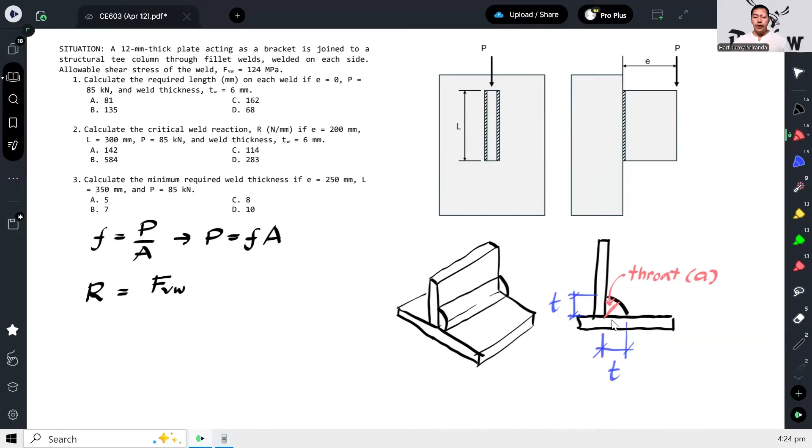So if you consider this triangle, let me enlarge it. This is the throat, this is the thickness, since this is 45 degrees. So for the length of the throat, using trig functions, you can use either sine or cosine, in this case cosine. Cosine of 45 equals adjacent over hypotenuse. So our A is T times cosine of 45. If you compute cosine of 45, that's square root of 2 over 2, or 0.707, so 0.707 of T.

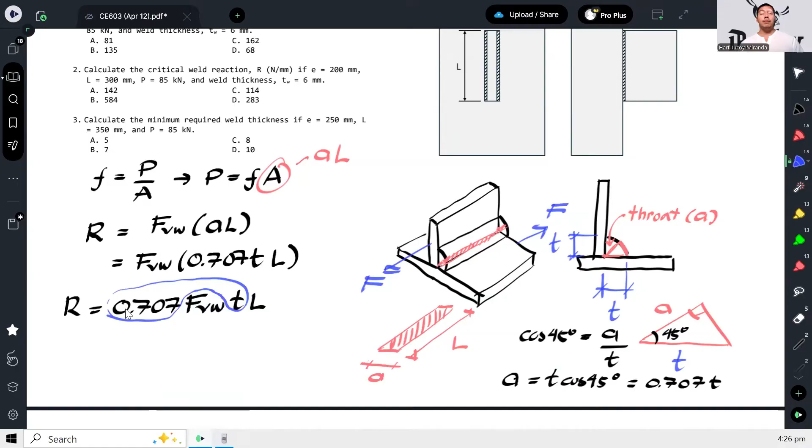But anyway, to calculate the required length: since the eccentricity is 0 for this problem and P is 85, there's no effect of bending or torsion. So we can say the total force on these two welds should equal P. There's R here and R here, so P is equal to 2R.

But what is R? We have P equals 85. So R is 0.707 FVW, that is 124, times thickness. The thickness given is 6 — that's what's asked, the L. So since this is in megapascal, we need it in Newtons.

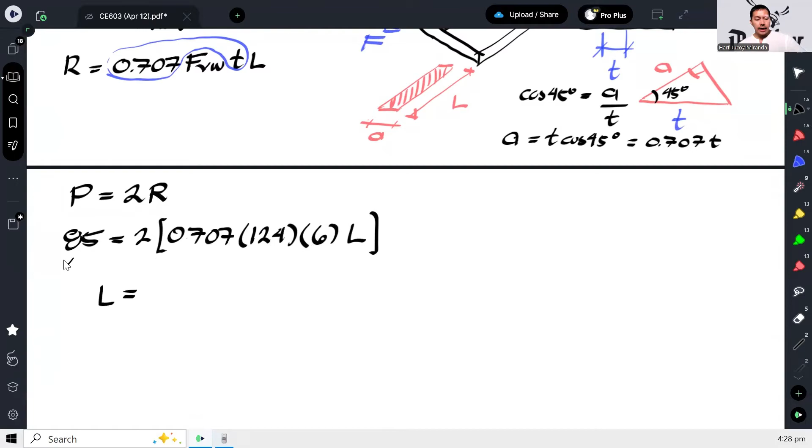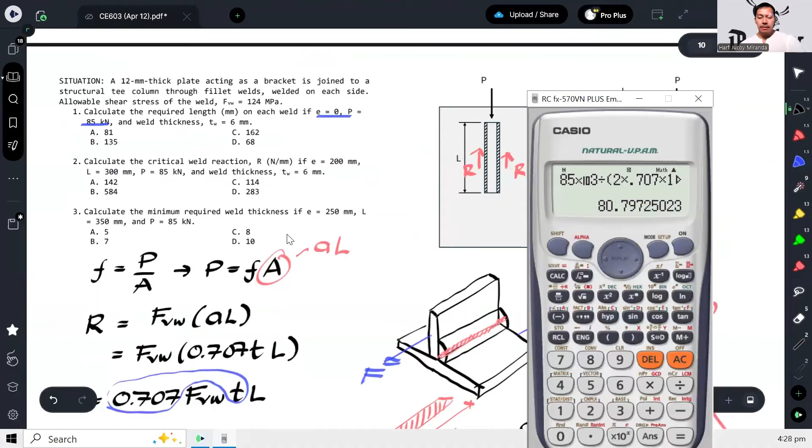So we have 85 over 2 times 0.707 times 124 times 6. The required length is... sorry, let me redo this. 2 times 0.707, that gives us 80.79 or 80.8 mm.

So we can round that up to 81 millimeters.

Number 2: calculate the critical weld reaction if e is 200 millimeters, L is 300, and P is 85, weld thickness is 6. So we're looking for the critical weld reaction in Newton per millimeter. Usually the weld is expressed in Newton per millimeter, especially when there's eccentricity present. This means we're analyzing which part of the weld is most stressed.

When we have an applied force, it will cause direct shear here. So it will cause direct shear. Let's call this RY, the unit shear force acting on the weld.

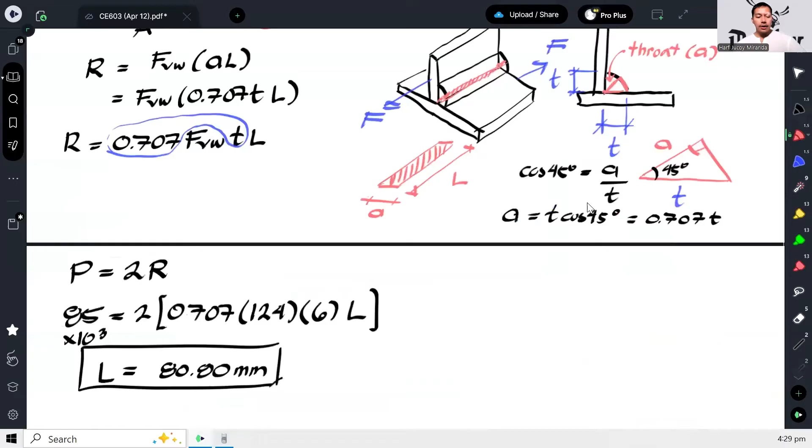So RY can be calculated as the applied P divided by the total L. In this case, we have 85 kilonewtons over the total L. Our total L is actually two L's, since our L for this problem is 300, and there are two L's because they're on both sides. So it's going to be 2 times 300.

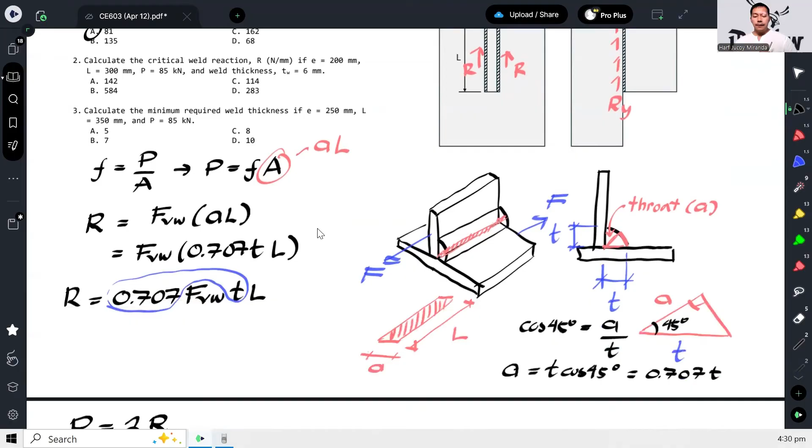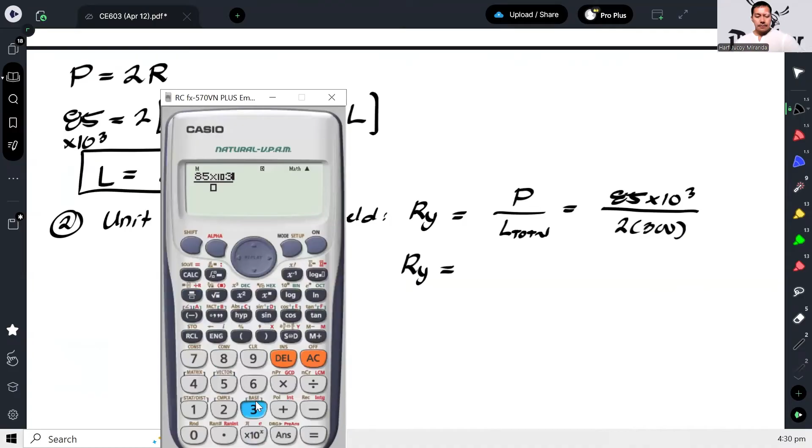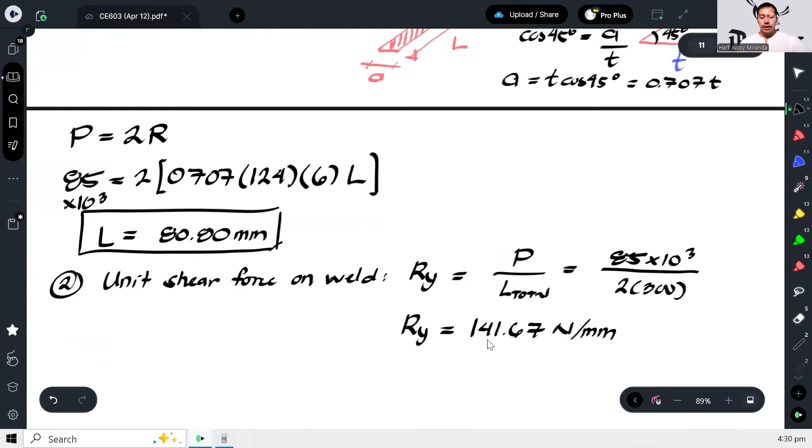That's gonna give us 600... so that's gonna give us 141.67 Newton per millimeter.

But that's not yet the answer because this is only the direct shear effect. That is the weld shear stress or shear force when E is 0. But take note, our E has a value, 200. So because of that value, there will be a bending effect, a moment.

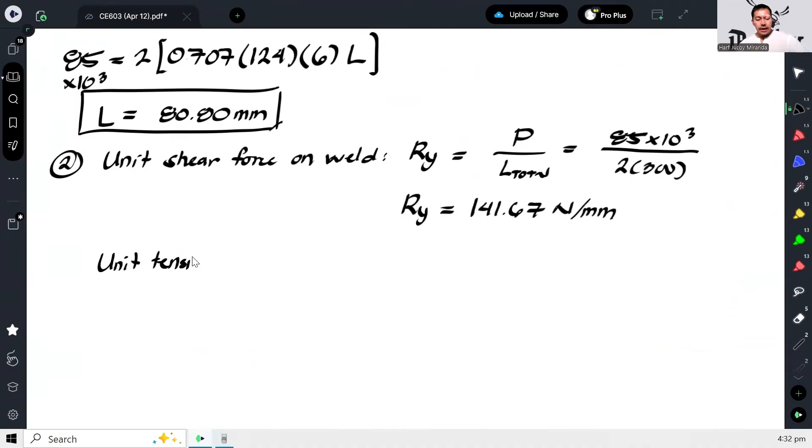The unit is tensile force on the weld - the maximum one, the biggest. So Rx, and that can be calculated as MC over I.

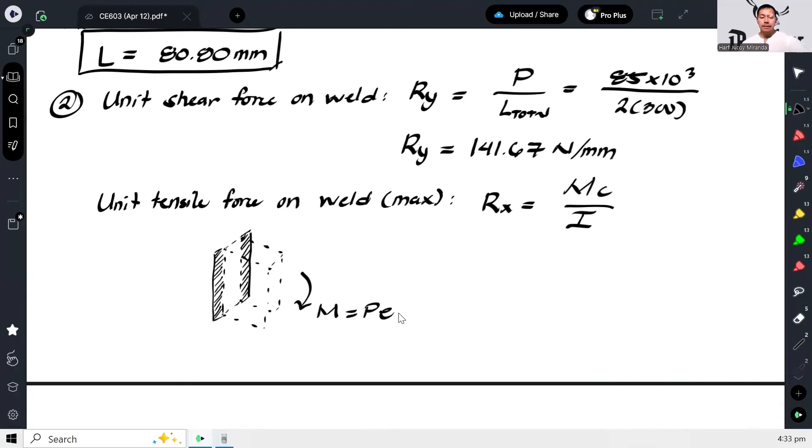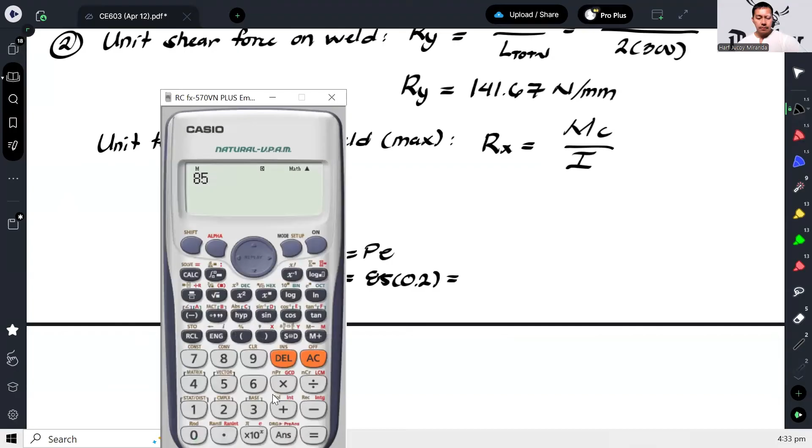Which is equal to P times eccentricity. Let me put in the values: our P is 85, and our E is 200. So 85 times 0.2 to make it kilonewton-meter, that gives us 17.

So this shaded region is the area that counters that force, for the moment, that's why it's MC over I. The neutral axis is in the middle, here. So that means our C is this, which is L over 2.

What is L? In problem number 2, L is 300, so that's 150. That's our C. Then the next question is, what is I?

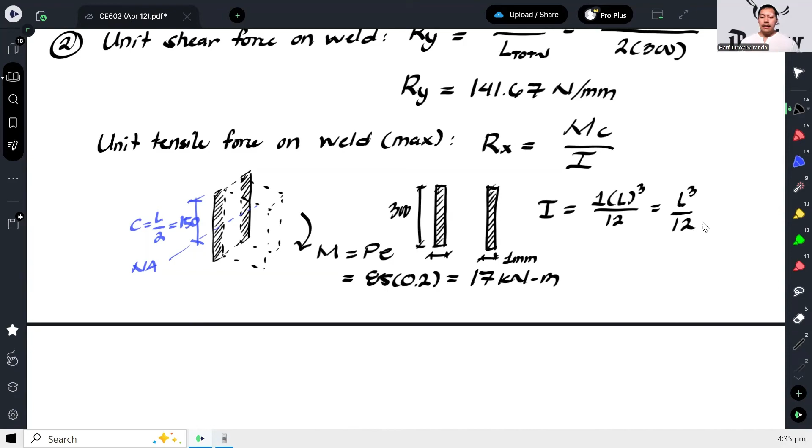So when we compute the moment of inertia, it's just L cubed over 12, then times 2 because there are two of them. So our Rx would be 17 kilonewton-meter, let's make that Newton-millimeter.

Our C is 150, then our I is L cubed, which is 300 cubed over 12, then times 2 because there are two of them. That will give us our Rx.

And that gives us 566.67 Newton per millimeter. Now, how do we calculate the total?

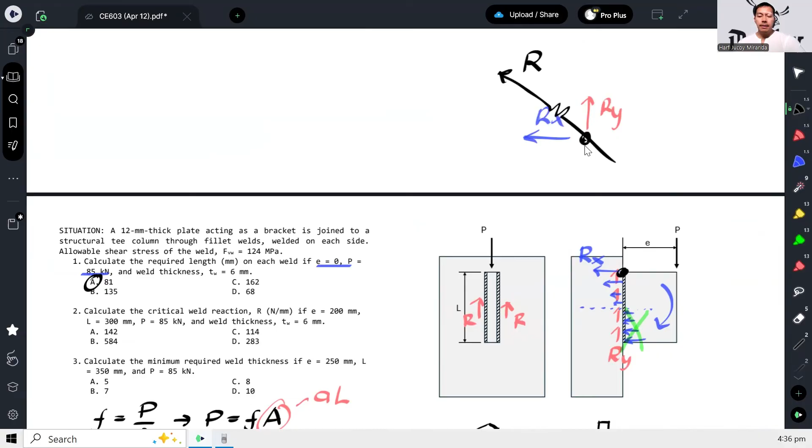The total is the resultant of these two. At this point, you have Rx, and you also have Ry, so their resultant is this. That's the total R, the maximum critical weld reaction. So the critical weld reaction R is just the resultant.

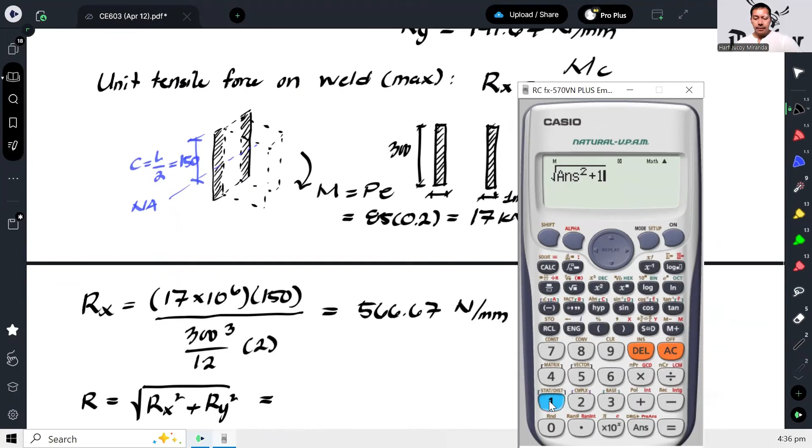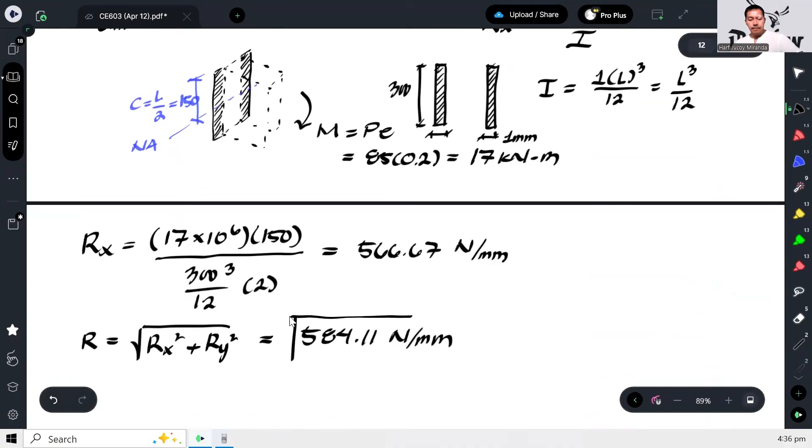And the other one is 141.67. So that gives us 584.11 Newton per millimeter. So for number 2, the answer is letter B.

Number 3: calculate the minimum required weld thickness if E is 250, L is 350, and P is 85. So let's repeat what we did since there's eccentricity again, but this time we'll solve for the thickness, T.

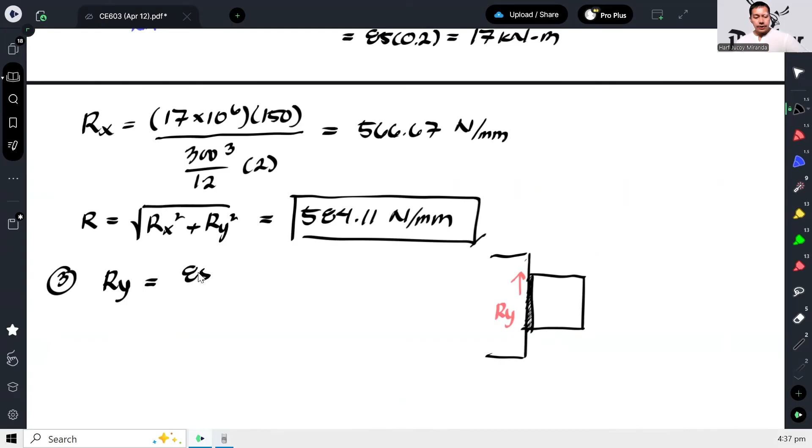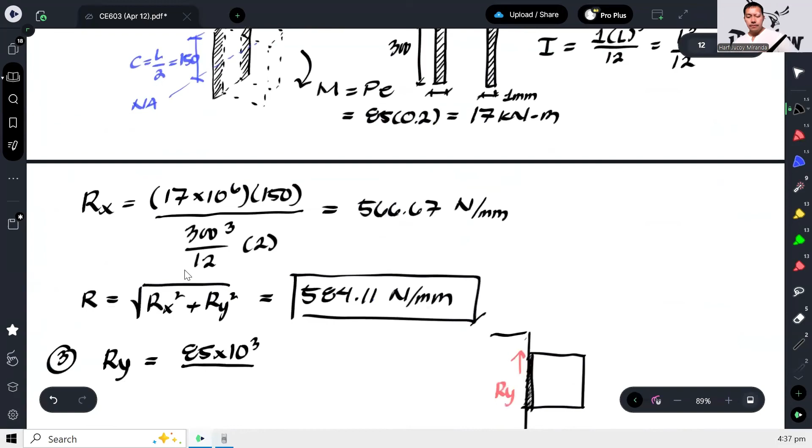Our Ry is just the applied force divided by L. In this case, the given L is 350. So our Ry would be 85,000 over 350, which gives us 242.86 Newton per millimeter.

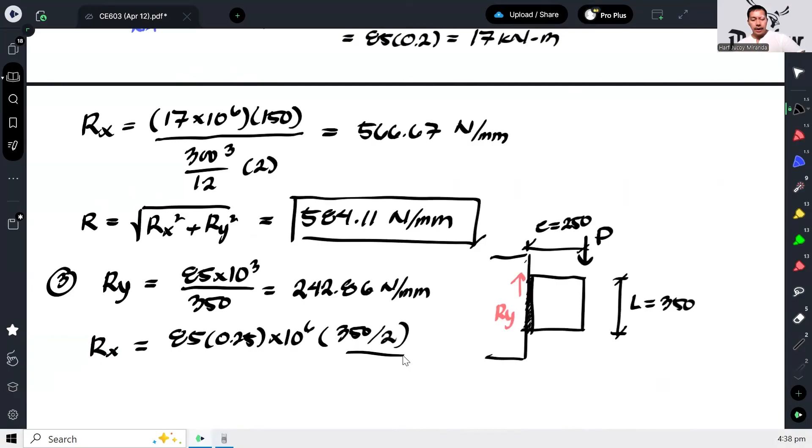Then our Rx, using MC over I: P times E times 10 to the 6, then our C is half of 350, over I. Our I is L cubed over 12 still, so 350 cubed over 12 times 2, since there are two of them on both sides. So our Rx would be...

520.41. Again, our R is just the resultant of these. So 574.29.

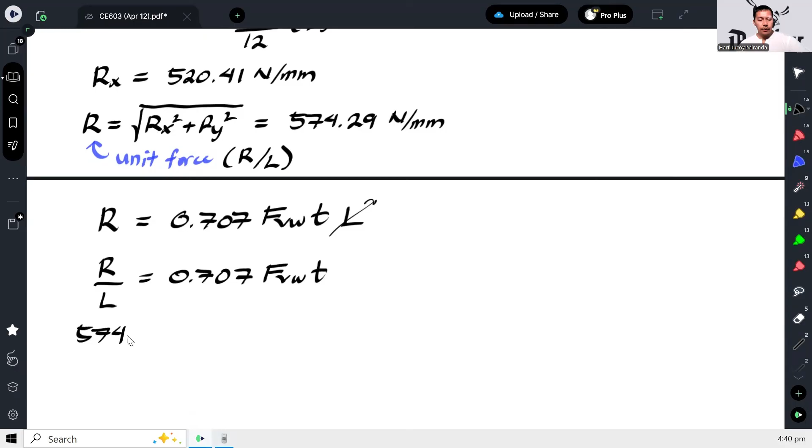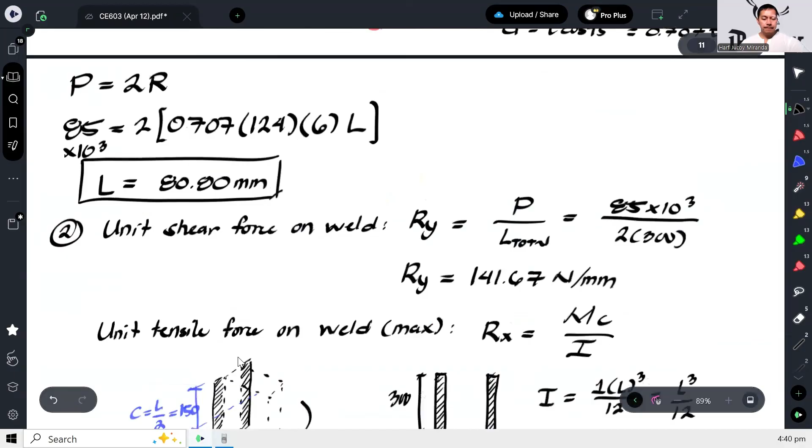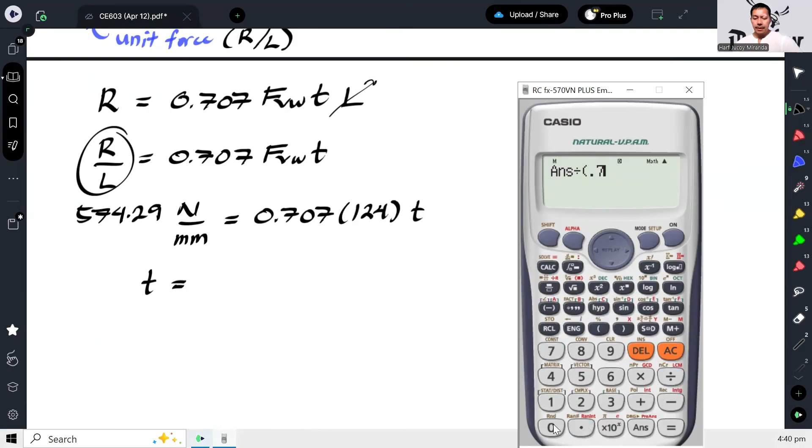So that's 574.29 - that's it, since it's already in Newton per mm, equals 0.707 times FVW, which is 124, times thickness. From here, we solve for the thickness of the weld: over 0.707 times 124, and that gives us 6.55 mm.

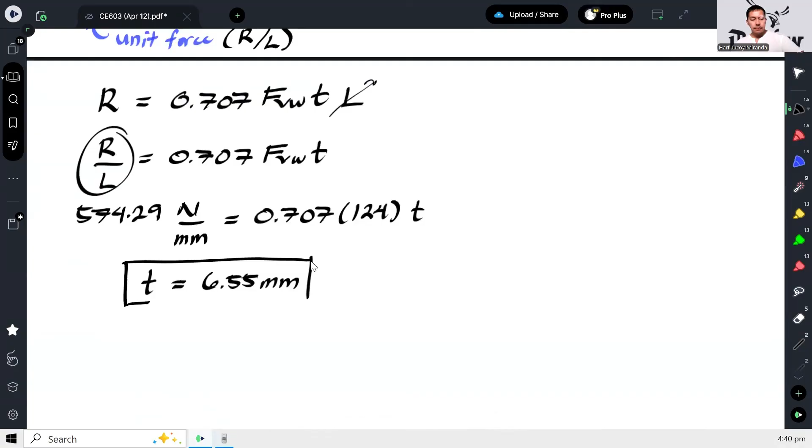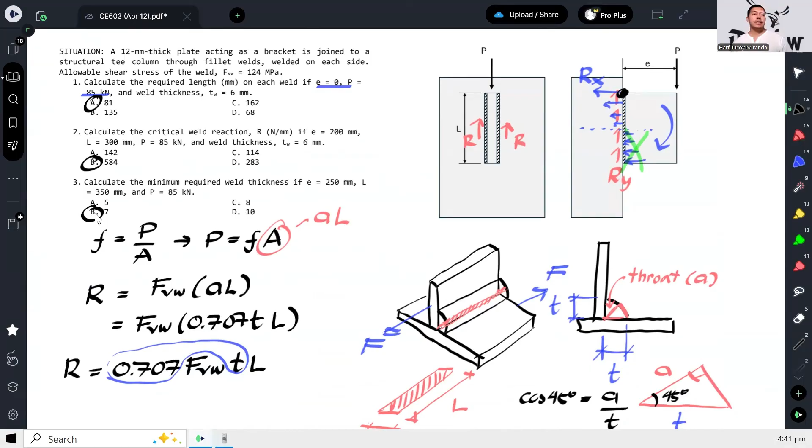From the choices, the values are whole numbers, so of course we use the next higher value - we round up to be safe. So our answer would be 7 millimeters, and that's how we solve this problem.